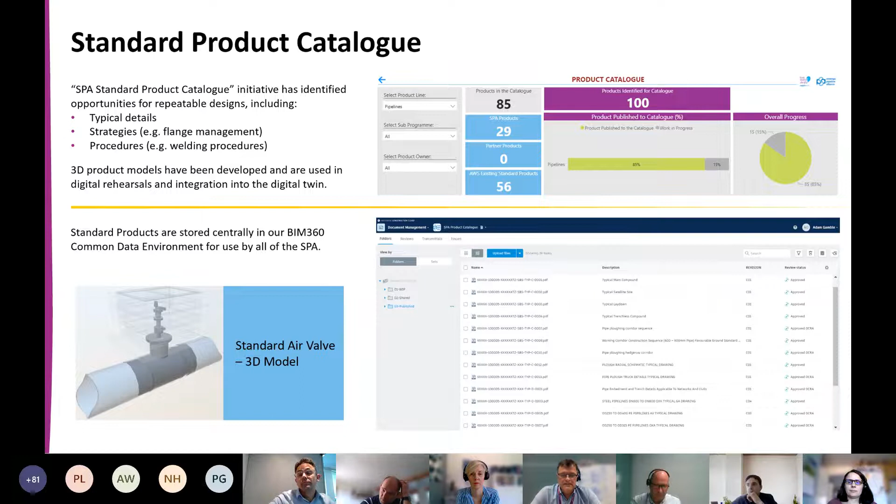Some of the products we've developed have been designed with a view to future monitoring. We're able to include fittings for things like hydrophones and pressure loggers. You can see from these details on top of the T's our washout assemblies, and also a riser pipe for fitting hydrophones and future pressure loggers, so we can get real-time monitoring by placing loggers and sensors in the boundary boxes.

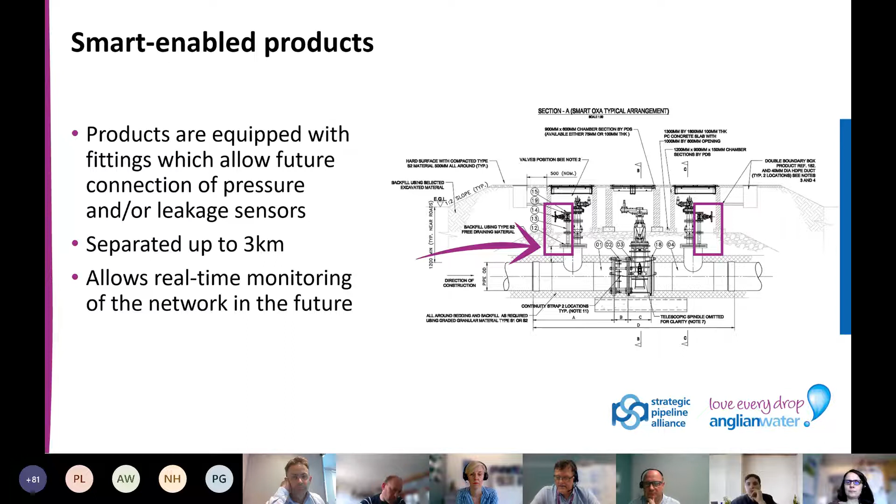Generally speaking, these OXA arrangements are placed at 3 kilometre spacings along the steel pipeline, based on how the hydrophones work, and generally located against highways or other suitable hard access.

Another element, as I mentioned previously, is the right first time approach. To achieve this, we're building time into the programme so we can trial products, procedures and strategies. This slide demonstrates that work we've done.

There's a slide missing there. Is there a slide prior to that? Sorry, thank you.

This demonstrates work we've done on flange management. The business took a decision at a very early stage that we were going to use welded steel pipe, and that, with the quality assurance around it, reduced the risk of failure or leakage through a high level quality assurance system for monitoring the welding.

We took on board some of the outcomes and discussions from a seminar the Guild held about a year ago, around flange joints, and in particular discussions around gaskets. We then went to the industry to try and understand these issues.

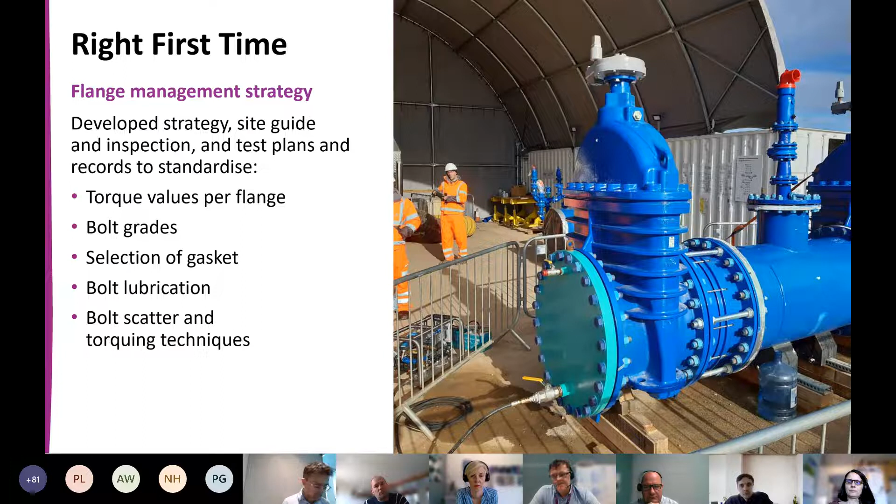These assemblies are built up in this workshop, as you can see here, checked, QA'd, and then transported to site.

As I said, at an early stage of the project life cycle, a decision was made to use steel for the larger diameter pipes. Learnings from recent projects that a lot of the partners have been involved in showed an issue with the weld methods and the generation of weld splatter. The weld splatter was a big problem, as it has the potential to damage the internal lining of the pipework. We know of no real safe method of being able to assess or repair the damage on pipelines from 800 mil down - you're never really going to get a machine or a man in there safely.

So again, we engaged with the industry, and a couple of weld methods were proposed. A flux core method, which is the traditional method used in the field, however that's the method that generates the weld splatter. So another method was put forward, a TIG weld method, however this is generally used in a workshop setting where the environment is stable.

So as per our production process, we trialed these. We put sections of pipe, set up a mock section, welded it, and undertook this installation.

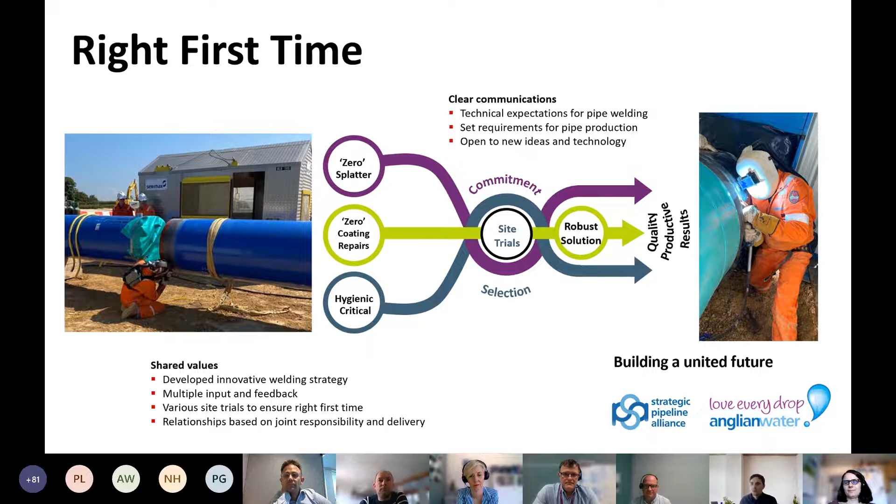This would ensure the quality of the product at the end, but also ensure we had a robust solution. Combining all these factors with the site trials and committing to SPA and its shared values, and going through all the procurement processes, we understood exactly what we were taking on and ensured we could deliver a quality product that would meet not just the strict zero splatter, zero repairs, hygiene critical requirements, but also, on a tight production schedule, come in and meet and exceed expectations with the TIG process - something we have managed to develop, achieve and deliver.

Yeah, perfect, one back. Perfect. So to get... Murdo, you've got one minute, if that's okay.

Yeah, no problem. So to get the quality, we looked at putting in a TIG process first, but that wouldn't give us the robustness of the weld. So we went back to flux core to ensure the integrity of the actual strength of the weld. Going back to the trials, the picture on the left is a camera monitoring the internals on a demo to ensure there was no contamination getting in during the trials.

We could then take that forward into production. So Serimax came in, proposed methods that were workshop orientated, but we made them work on the field. I think that'll be my time.

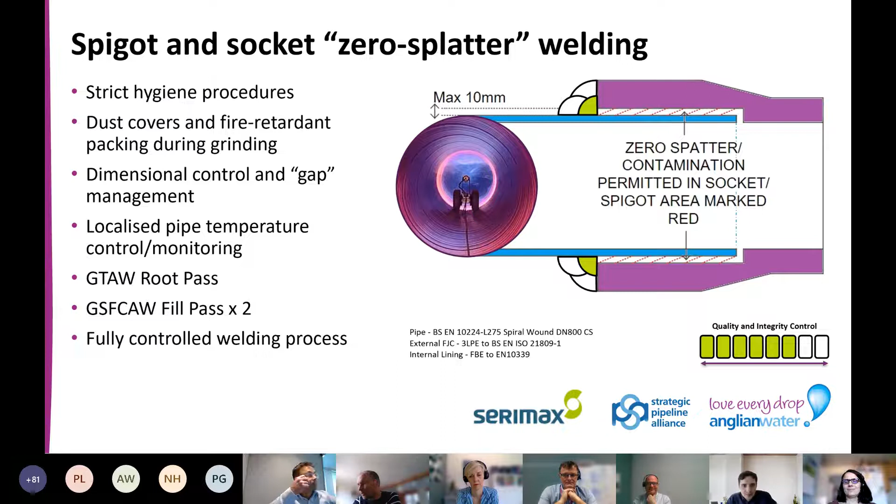Thank you, handing over. Super, Rob, thanks. Yeah, thank you. Thanks, Murdo, thanks, Stephen. So yeah, I'm Rob Slade.

I work for Anglian Water and I'm head of strategic supply integration. I suppose, what does that mean? Fundamentally trying to help and support SPA in terms of the design, construction, and then commissioning, and then fundamentally how we integrate the strategic interconnector into BAU at the end of this AMP.

So first thing to say, it says waterless commissioning - it is, depending on how you say this. In my head, this is not about using no water at all. This is water-less commissioning. It's an important point in terms of the journey we've been on over the last 18 months, a couple of years. If you could just go to the next slide please.

So fundamentally, the challenge - we've talked about design. Ultimately there's the construction element of this about putting essentially 400 kilometres of pipeline into the ground. That's a big enough challenge in itself. In my head, equally, is about getting water into the pipeline, testing it, commissioning it, and making use of it when it comes out the other end.

If you think about this traditionally, and this is widely transferred across the industry, there's a traditional approach to commissioning pipelines that uses an extreme amount of water. If we applied this traditional approach in SPA, we would have in the region of a 1.5 billion litre requirement, which is huge. And it's rather perverse, in terms of delivering a strategic interconnector in a project like this - which is fundamentally about reducing and addressing long-term supply-demand imbalance - were we to actually use a significant amount of water in commissioning this project.

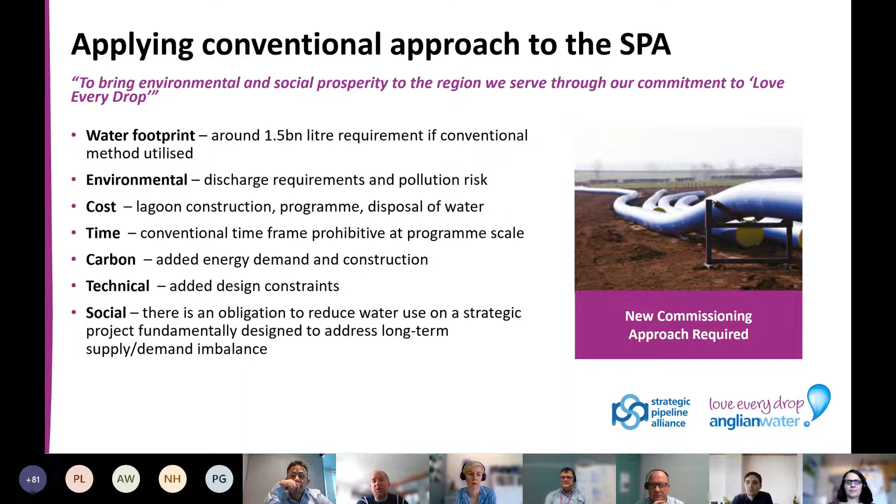Ultimately, we knew very early on that a new commissioning approach was required. So if you could just go on to the next slide, please, Gabby.

It's fair to say when we started this process in terms of what could we do, one of the things that was absolutely going to be really important to us as we start on that journey is really around the upstream process. Stephen and Murdo touched on this just a couple of minutes ago, but we have had an absolute laser focus on food-grade hygiene when it comes to where our product is coming from.

The steel pipeline itself, and there's MDPE that we lay, HDPE that we're laying as well. So there's very much an audit process in place with regards to where it's manufactured, where it's transited, and how we then store and install the pipeline. We've created a lot of focus around the hygiene charter.

Again, training, making sure that it's visible and making people aware of the need to ensure that hygiene practices are maintained wherever possible. Site hygiene boards as well.

Again, it allows the site agents and construction managers to be really clear about what the challenges are on different aspects of that site. Hygiene boxes at every work location, and you can see an example of that in the bottom left-hand corner.

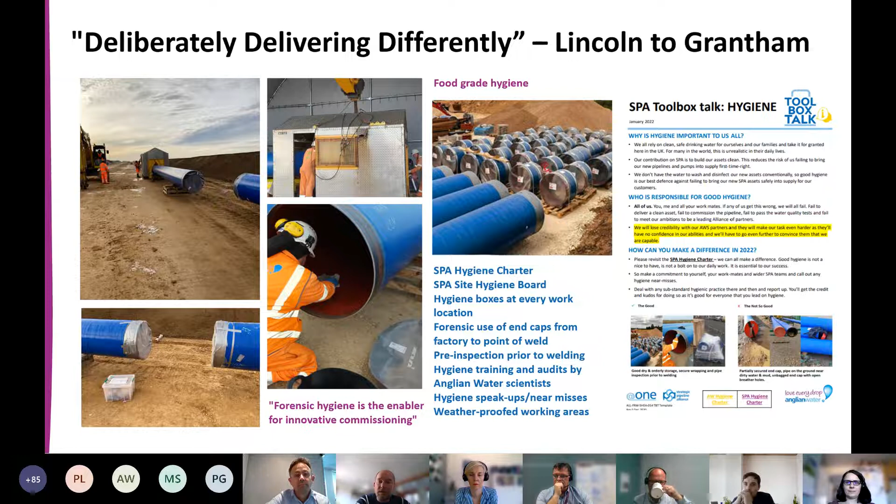So if you could just go on to the next slide, please. We spent a lot of time working with the partners within SPA and across the wider industry in terms of trying to understand what the art of the possible is with regards to this.

Building on what Stephen and Murdo talked about, is the importance of trials before we actually start to do this in anger. We were really fortunate that on Lincoln to Grantham, we were able to start to trial some of these techniques that we wanted to use in SPA.

We've also been fortunate in terms of using a pipeline in one of our Norwich to Wymondham schemes, where we could actually start to try and understand the benefits of this and put it into practice with regards to what we can actually use and how we can scale this up as well.

We very much centered around the use of air to drive swabs, both in washing and also the disinfection. So instead of water driving the swabs, we've actually got air, which is driving two swabs, which has got a slug of either wash water or chlorinated water for the disinfection process.

That has been hugely successful on the trials, and as you can see in some of those stats, we've certainly got 99% water saving during the air swab washing. We've pipeline cleaned to drinking water standards within 24 hours of that as well. 85% water savings during the air swab disinfection, and all of those had a 100% water quality pass rate.

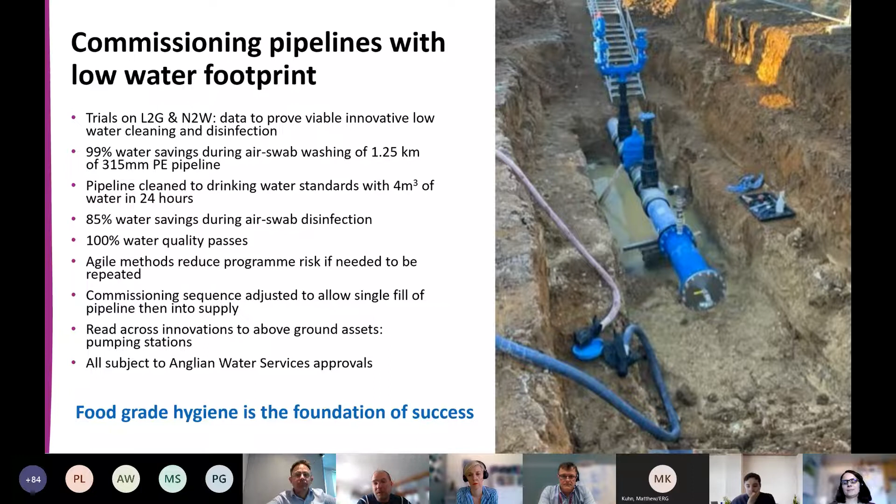And as of yesterday, we've now got this process approved in terms of a document that we call POSWAT, which is essentially our standards and our policies when it talks about water hygiene, because that's the fundamental point here. Obviously, the standards that we talk about have to ensure that when we commission and put the pipeline into supply, we are maintaining that high quality of water that we need to make sure that we are providing to our customers. If you could just go on to the next slide, please, Gabby.

So essentially benefits, and again, these are all scalable. They can be used both on the large diameter steel pipeline, the largest of which is 800 that we're using in SPA, and for the remainder of the interconnector, we go down to 560 PE. So these are all scalable in terms of what we're actually trying to do. We've got a significant reduction in water footprint to circa 1% of conventional methods for swab washing. Significant reduction in the water footprint for disinfection, roughly around 85%, while still meeting our water quality standards.

Reduction in lagoon size is estimated to be 75%. That still needs a little bit of work because, hopefully based on the demonstration that Stephen talked about in terms of that flange management, that QA wrapper around that, we won't have certain failures around flanges when we're doing pressure tests. But if that was to occur, then we need to think again about what the mitigation action is with regards to that. But again, this all builds in terms of that process and that production line mentality that we're trying to include within SPA.

It obviously reduces environmental risk from large volumes of water being released into the environment. Definitely a reduction in program for commissioning and reduced risk to SPA commissioning by adoption of the hygiene and SPA jointing practices. It is also quite agile, so it does allow us to deal with certain flexibilities, to deal with uncertainties. So for me, it's been a great challenge. We are literally just on the cusp of that getting approved, and we will absolutely use it as a base solution for SPA moving forward when we start to commission these 400 kilometres.

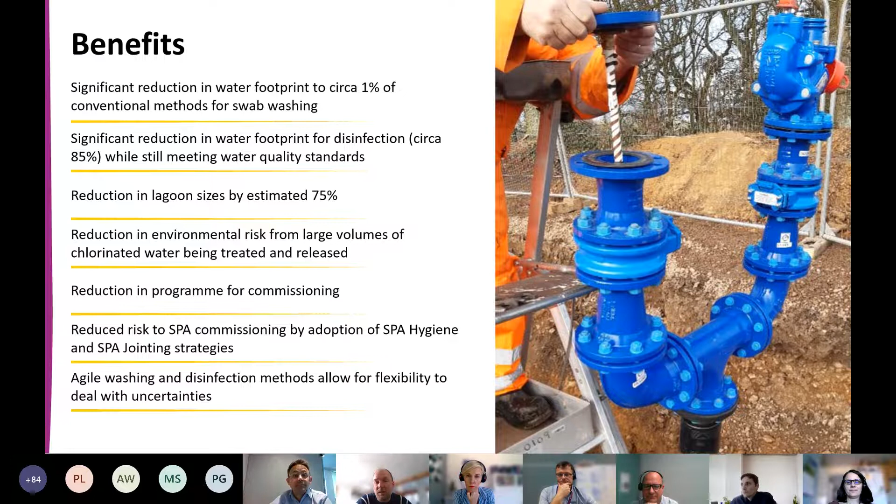This is my last. I've got 3 slides here to go on 6 capitals thinking. So next slide, please. I lead on sustainability for SPA. So we are using something called the 6 capitals to help us drive sustainability through SPA, and this is something that Anglian Water developed about 3 years ago. And why did it do it? Well, to help Anglian Water bring environmental and social prosperity to the region it serves. So that's its purpose. And so we have adopted the 6 capitals approach, and we are using it to drive sustainability in SPA.

But what is it? Some of you will be very familiar with it, but for those who aren't, you'll at least be familiar with something like natural capital, I'm sure. So natural capital recognizes the value of the environment and the ecosystem around us. And we want to be able to deliver the SPA solution in a way that protects or ideally enhances the natural capital. So that is one of the lenses through which we examine everything we do. How well does that solution meet the natural capital needs? And Rob talking about the waterless commissioning is an excellent example of that.

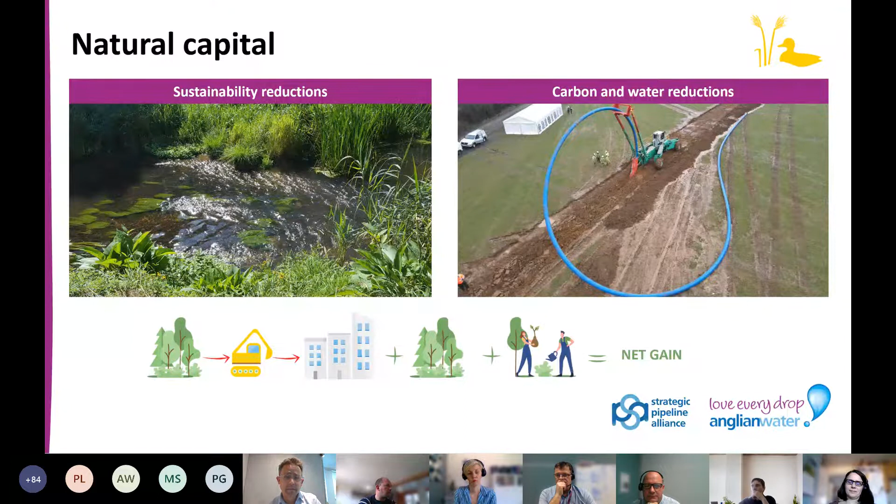The last one I'll mention is biodiversity net gain. So we know the environment bill is bringing this in, and SPA will be delivering a 10% biodiversity net gain on the new sites that it builds. So that's another aspect of natural capital. Last slide, just to bring some other examples.

So let's look at social capital, how we are protecting and enhancing that. Ellie has led on developing a strategy to ensure that we really do engage with our communities in a strategic way. She's talked about the virtual public events, which are a great way to engage with the community, and that is at the heart of delivering against social capital. But there are other ways as well.

Kickstart is a slightly newer thing, which was a government scheme to get 16 to 24-year-olds, I think it was, who are on universal credit, give them a taste of work, and hopefully that develops into a role. So it was initially a 6-month placement. We took on about 5 Kickstarters, 4 of which are still with us at the end of that time. So it really is helping to create jobs and careers in our region.